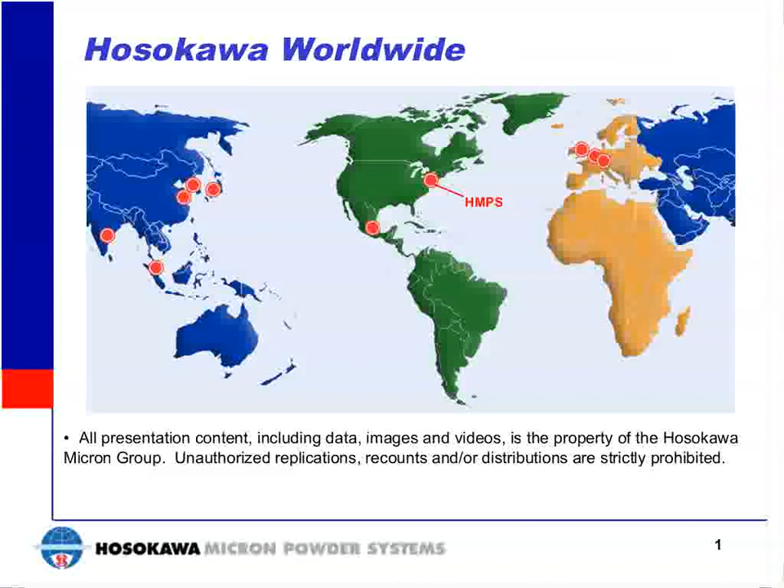Hosokawa Micron Powder Systems is a division of the Hosokawa Micron International Group. Our parent company, Hosokawa Micron Corporation, is headquartered in Osaka, Japan. We are the global leader in powder processing equipment and systems, with 8 operating units and 6 sales offices around the world. We have over 1,500 employees worldwide, production facilities in 5 countries, and 12 technical centers with state-of-the-art research facilities. We encourage our customers to visit our facilities, where they can partner with us to develop new materials and processes on more than 30 different pilot and production lines for size reduction, classification, mixing, drying, and many other technologies.

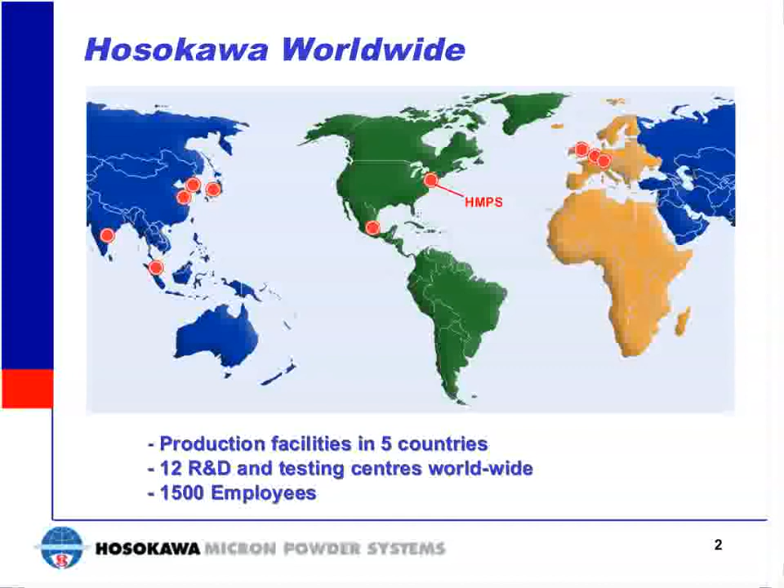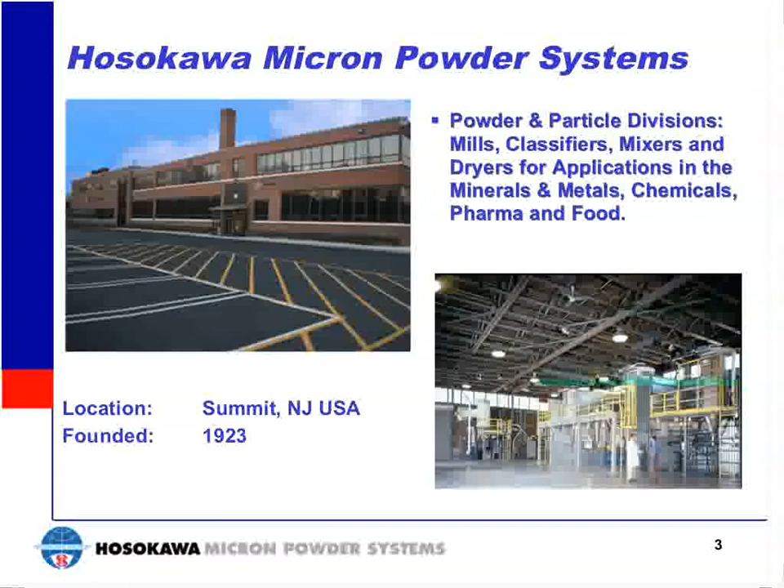Thank you, Greg. Good afternoon, everyone. For the next 35 minutes or so, we will cover the basics of dry powder classification. We will talk about several different types of classifiers and their application. We will also discuss some classification theory, and we will look at how classifiers are used as part of a powder processing system.

Classification and separation of materials is not a new concept. Various forms of classification have been in existence for thousands of years. Significant developments in equipment and machine design over the last 150 years have allowed for the improvement of separating and classifying powders. The end result has been to improve the ability to control the desired separation point, or as we now call it, the cut point, and to optimize the yields of the coarse and fine fractions. Equally as important is the ability to produce high-quality products on a repetitive basis.

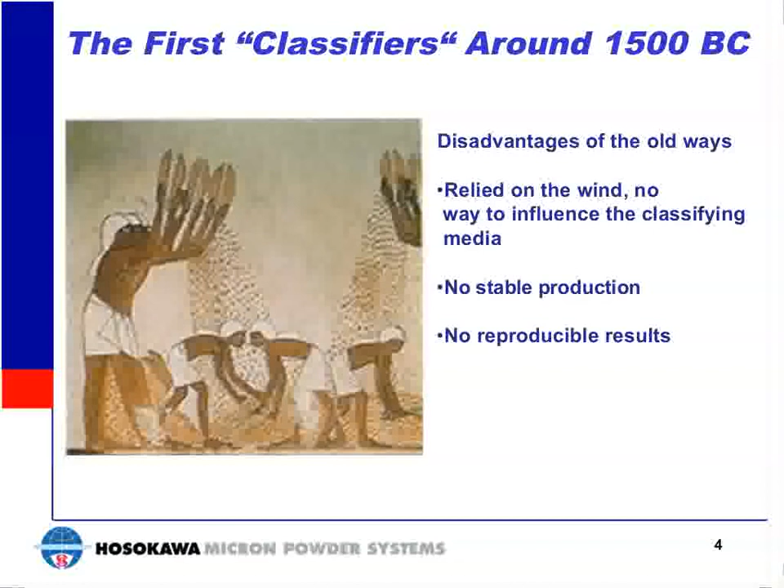Classification is the process of separating or dividing a given material into multiple fractions quantified by its distinguishable property. The most common property being particle size, where we separate larger particles from smaller particles. Another property would be density, separating heavier particles from lighter ones. Particle shape is yet another property for separation, as an example, the separation of spherical particles from plate-like particles. Unfortunately, separation by shape is normally very difficult to accomplish.

Most commonly, the fines fraction is usually the end product, and the coarse fraction is discarded, or as an example, the coarse fraction could be returned to a mill for further size reduction. There are some applications where the end goal is to dedust the product. In this case, the coarse fraction is the end product, and the fines are discarded.

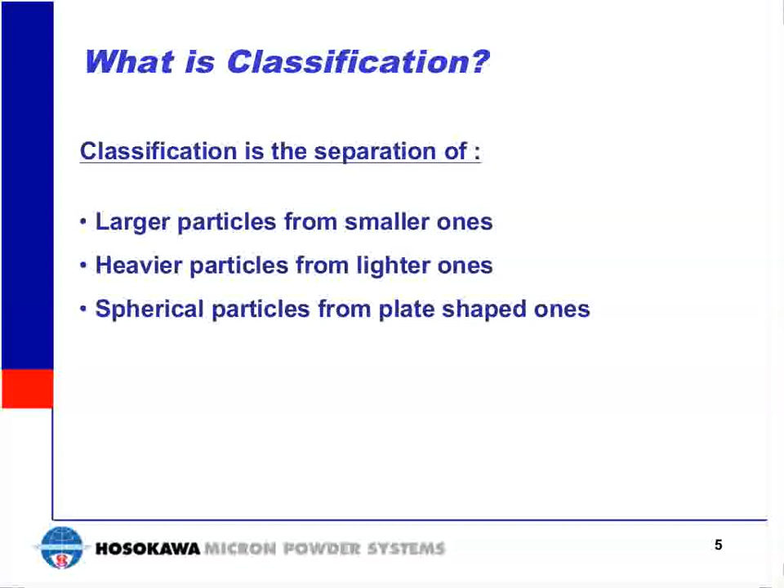There are numerous methods available for classifying dry powders, so we will begin by categorizing these methods by equipment type. Mechanical sieves can be used in various styles to screen or sieve powders through perforated or woven screen sheets with different opening sizes. Crude separation of powders can also be accomplished with cyclones. This is a good solution when only fine particles are to be removed. Gravity classifiers use gravitational force, weight, to create a force on heavier particles, separating them from lighter particles that are more susceptible to the force created by airflow.

Separation by gravity can be accomplished for cut sizes in the range of 500 microns up to several millimeters. For cut sizes of 200 microns down to 1 micron, dynamic classifiers are required. Above 100 microns, mechanical screeners are usually the most efficient and cost-effective method for classifying dry powders.

Dynamic classifiers use a centrifugal force developed by a rotating classifier wheel to oppose the drag force created by opposing airflow to separate particles.

The most flexible and efficient type of technology for ultrafine classification is the dynamic air classifier. It uses the forces we just mentioned to split the powder into two fractions, one fine and one coarse. It's important to note that when separating particles below 10 microns, the energy required to overcome van der Waals forces becomes significant. In these applications, high energy dispersion classifiers are required.

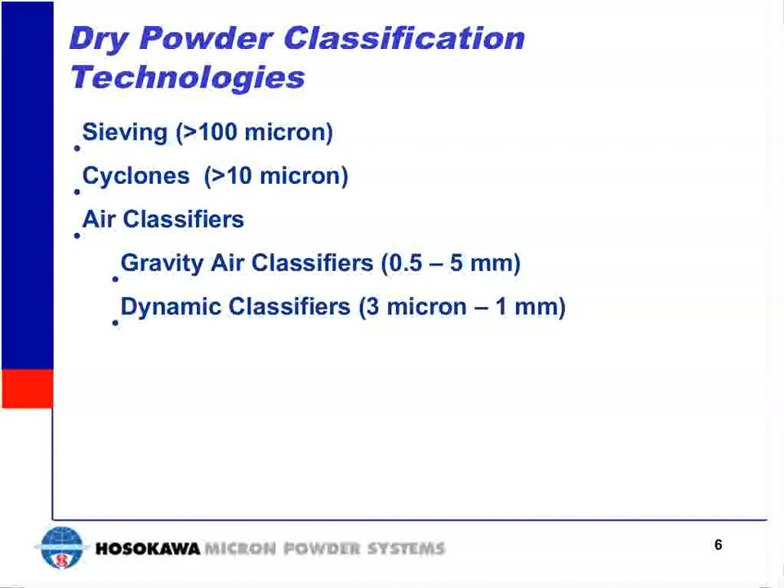Let's spend some time to talk about terminology used in classification.

Throughput is usually defined as the mass flow rate of material through the air classifier. Throughput of a classifier primarily depends on the airflow and the classifier wheel size. Higher airflows and larger classifier wheels can provide higher throughput.

Yield is the measure of the product collected, irrespective of quality, and is calculated as a percent of product, fines or coarse, to the total feed amount.

The next term is classification efficiency. Classification efficiency is the measure of the percentage of the fines or coarse being extracted from the feed material. The exact value of the efficiency might change depending upon the values being recorded.

Cut size is probably one of the most important terms when defining your separation requirement. It is the point of actual separation, defined as the particle size that is found to have the equal probability of being in both the fines and coarse fractions.

Cut sharpness, on the other hand, requires some additional information in order to make a calculation. In generic terms, it indicates how effective the classification is, and how much of each fraction's size distribution overlaps the other classification. In a very sharp cut, each fraction contains mainly the particles above or below the desired cut size.

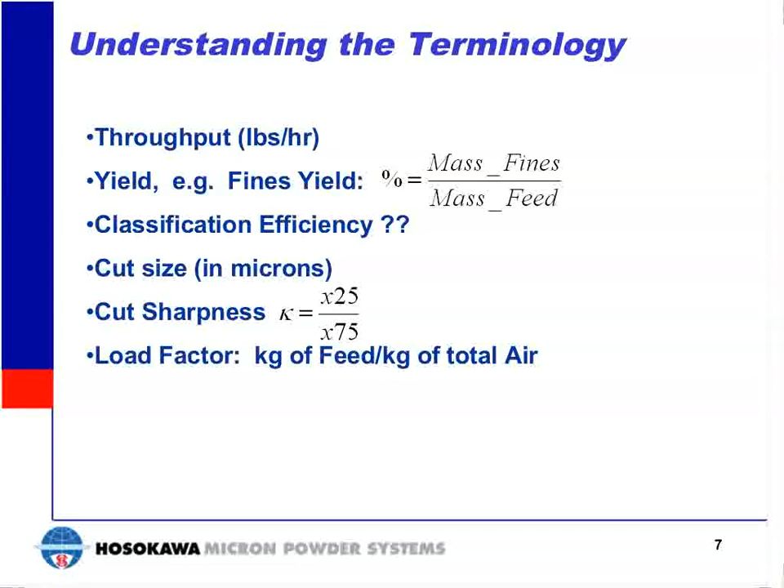So when we're talking about a cut size of 50 microns, we're trying to split our feed material into two streams, with one segment of particles smaller than 50 microns and the other segment of particles larger than 50 microns. Also, by theory, half of the 50 micron particles will be in the fines fraction and the remaining half will be in the coarse fraction.

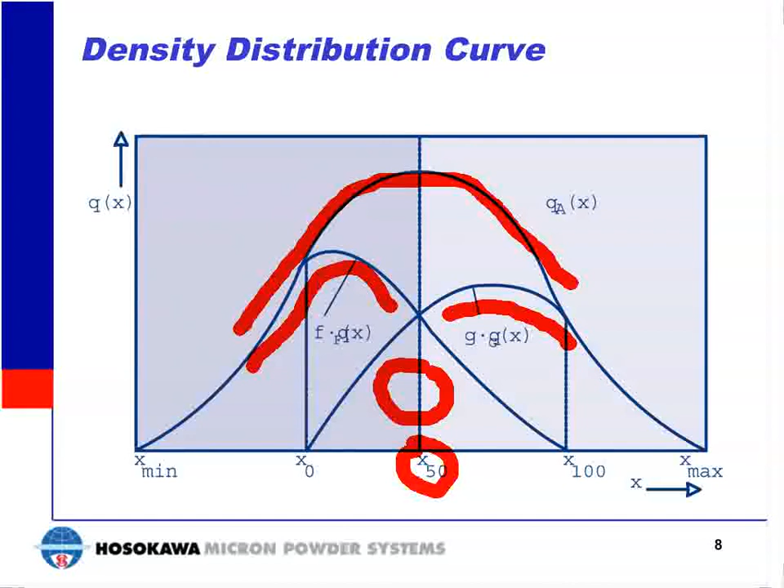Very good classifiers can operate with an overlap value of around 10%. However, in most industrial applications, the overlap is higher, in the range of 20%. It can even be as high as 30% when higher loading factors are employed to maximize capacity. Targeting cut point sizes below 10 microns will also have a negative effect on the sharpness, causing larger overlaps due to the higher interparticle forces in fine powders.

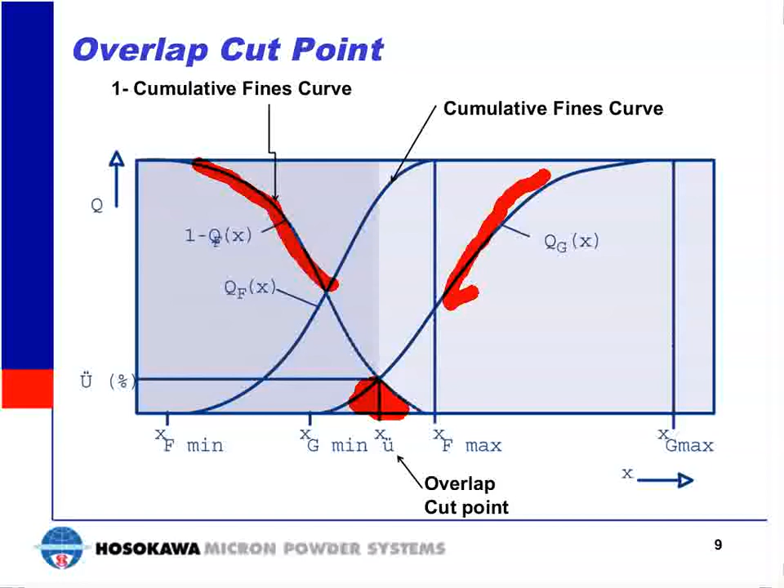Sharpness is often used to quantify air classifier performance. Particle size distribution sharpness values range from 0, almost no classification, to 1, ideal but not really achievable in practical applications. In a production environment, an air classifier's cut sharpness ranges between 0.3 to 0.7. At low classifier loads, the cut sharpness can reach values of up to 0.9. A good classifier can achieve a very fine cut size with a high degree of sharpness.

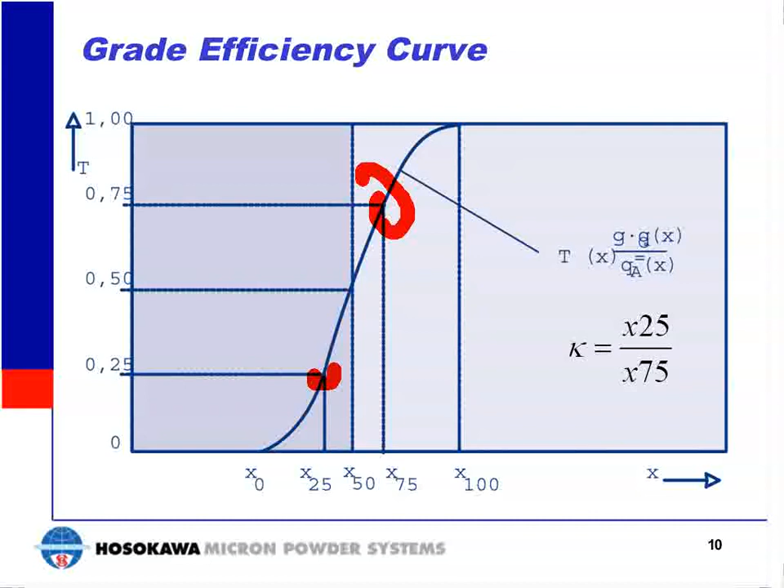First, we analyze the feed and find that in the 100 pounds of feed material, we have 40% of the material below 30 microns and 60% of the material above 30 microns. After classification, the fines fraction contains 30% of the original feed material, with 83% or 25 pounds of the fines fraction being below 30 microns and 17% or 5 pounds of the fines fraction being above 30 microns.

In this case, the fines yield is 30%, and the efficiency is defined as the amount of below 30 micron material in the fraction divided by the total amount of below 30 micron material in the feed material. In this case, 25 divided by 40 gives us an efficiency rating of 62.5%. A similar calculation can be done to achieve the same information for the coarse fraction. Here you can see the efficiency on the coarse yield is much higher at 91.5%.

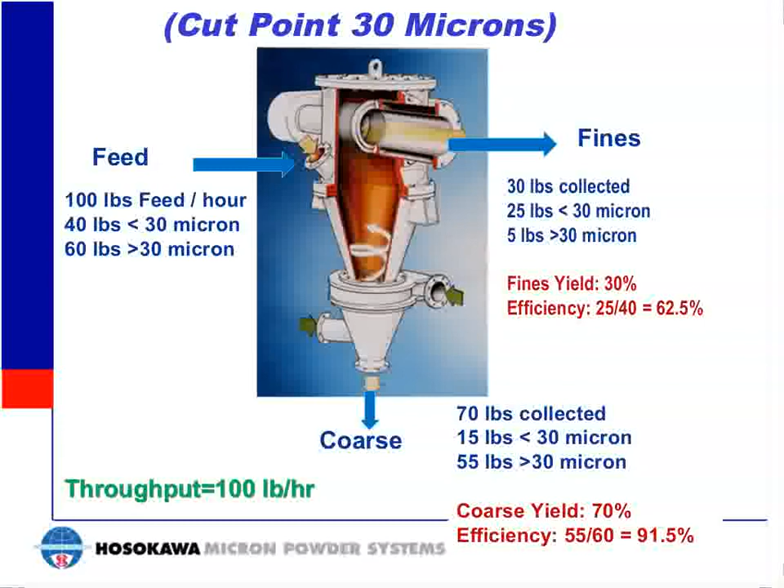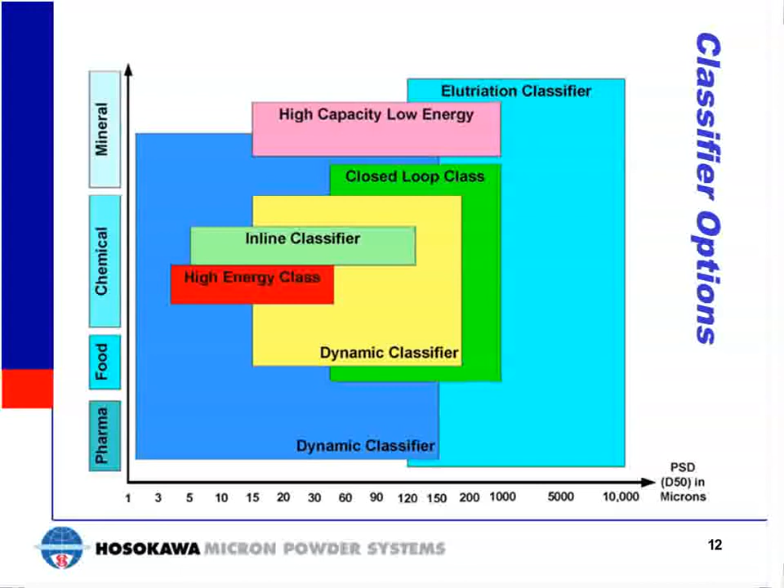The first technology we'll discuss is the mechanical separator. The mechanical separator works via a mechanical screening or sifting technique. This technology uses a wire mesh screen with different opening sizes to separate a given product into two or more fractions. There are two basic types of screeners available in the marketplace.

These units are particularly suitable to classify free-flowing powders with a low angle of repose. Vendors offer a range of screening motions and amplitudes to effectively move the material over the screens. Depending upon placement of the unbalanced load, different types of motions can be created. These devices usually can operate with a 90 to 95% efficiency, which makes them very attractive options in applications where they can be utilized. One of the major drawbacks with this type of classification device can be the blinding of the screens. This can result in significant degradation of sieving performance.

Therefore, a number of different screen cleaning devices have been developed. Some of these options are balls or discs that bounce under the screen to cause additional impact from the bottom up to dislodge particles and keep the screens clean. Another option is reverse airflow, which could consist of a sweeping arm that can blow air from underneath to keep the screen clean. Brushes, ultrasonic devices, or combinations of the above can be used to keep the screens clean and make the screening process more efficient.

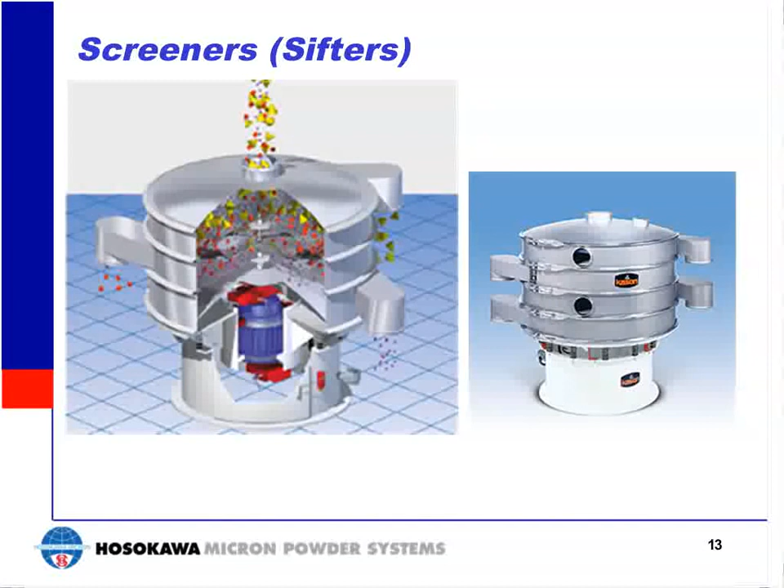There are a couple of additional terms worth mentioning when discussing classification in general. The first term is scalping. Scalping means the removal of a small percentage of coarse material that could be in the feed material. The second term is dedusting. Dedusting is just the opposite and means that a small percentage of the fine material is the undesired fraction that needs to be removed from the feed material.

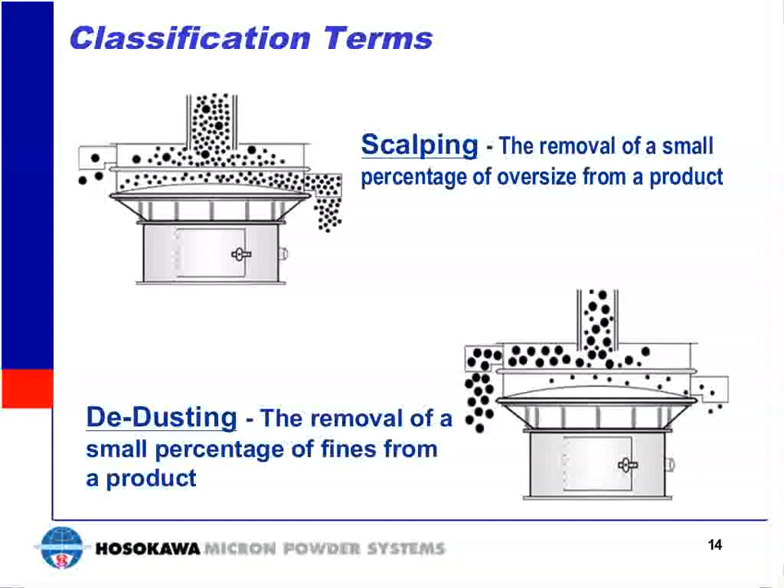Another type of mechanical screening device is a centrifugal screener or rotary sifter. These units are typically used for materials with more difficult flow properties and when higher throughputs and capacities are required. This device uses a cylindrical wire mesh or cloth screen of a specific opening size to control the cut point.

Within the screen, a rotor is used to mechanically disperse and centrifugally force the material to the screen, with the fines passing through the screen into the fines outlet. The coarse material travels horizontally to the end of the screen where it is discharged through a separate coarse outlet.

This type of screener is more suitable for applications where the coarse fraction is not significant, typically in the 10% range or less. One shortcoming of this technology compared to the screening deck we saw on the previous slide is that these units will only allow for one single cut or separation point at a time.

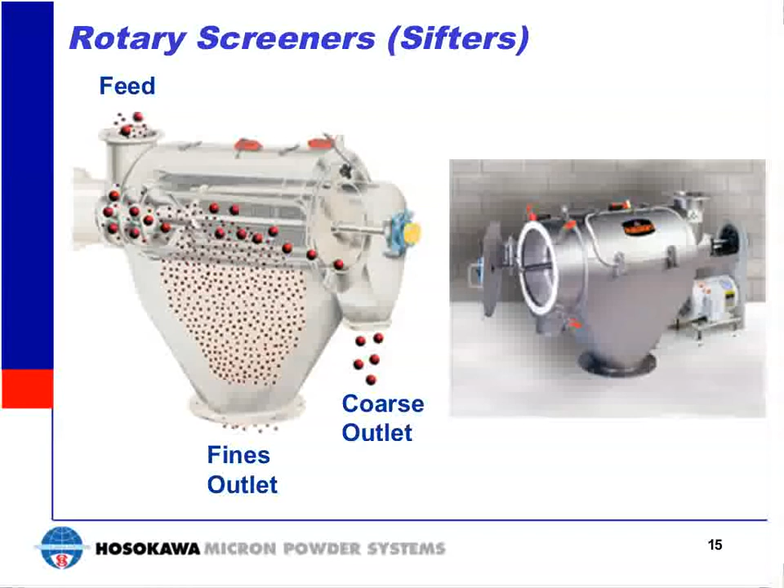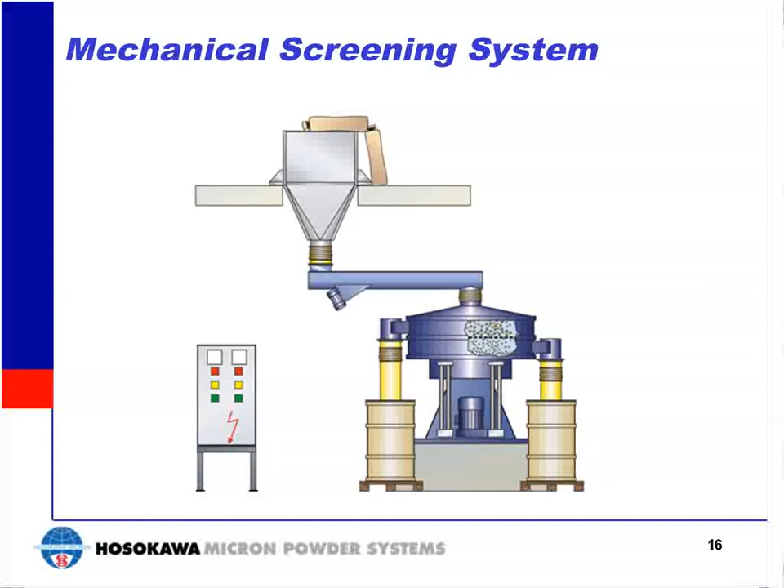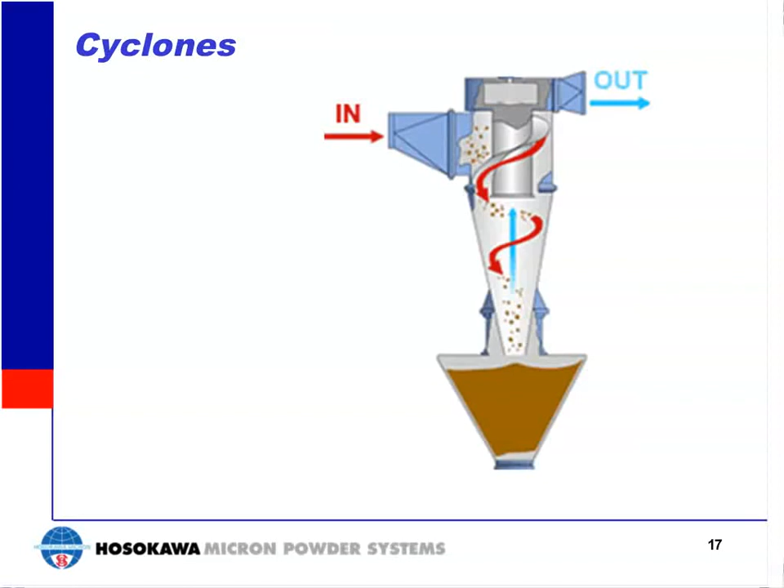One of the parameters that affects performance is the diameter of the outlet tube. By reducing the outlet tube diameter in a cyclone, the effective outlet vortex will be reduced, causing an increase in the collection efficiency of finer particles. The downside to this improvement will be the increase in the pressure drop across the unit.

While a typical cyclone will work with a 6 to 8 inch water column pressure drop, a high efficiency unit can reach pressure drops as high as 15 to 18 inches. Due to their very simple construction, it is also fairly easy to design them for high pressure ratings to handle materials that can present potential explosion hazards.

I would like to add that with most high efficiency cyclones, you will find an additional chamber or dust trap under the conical section of the main cyclone housing. This additional chamber will minimize the chance that the product being discharged will get re-entrained into the center vortex, hence improving the collection efficiency. The simple design of these units makes them easy to troubleshoot as well.

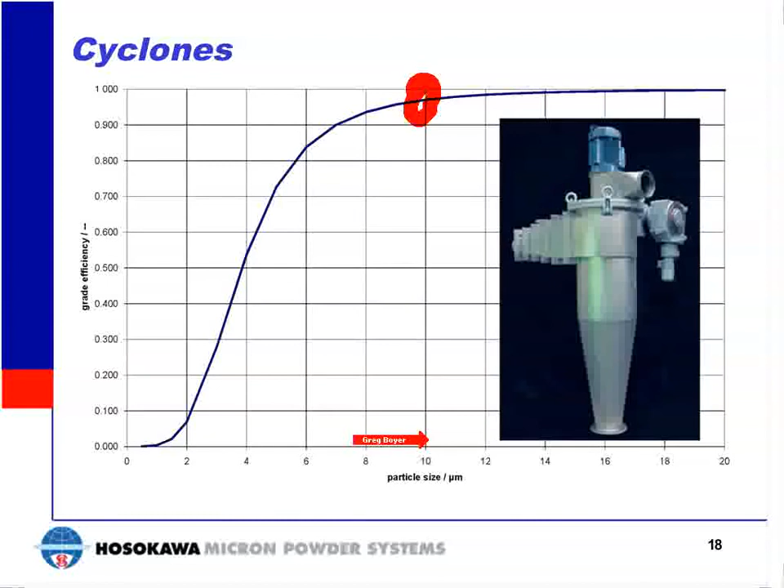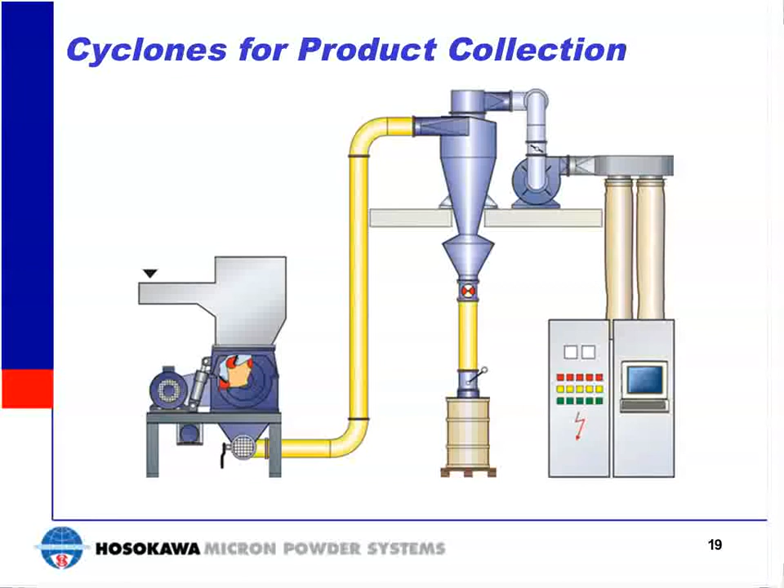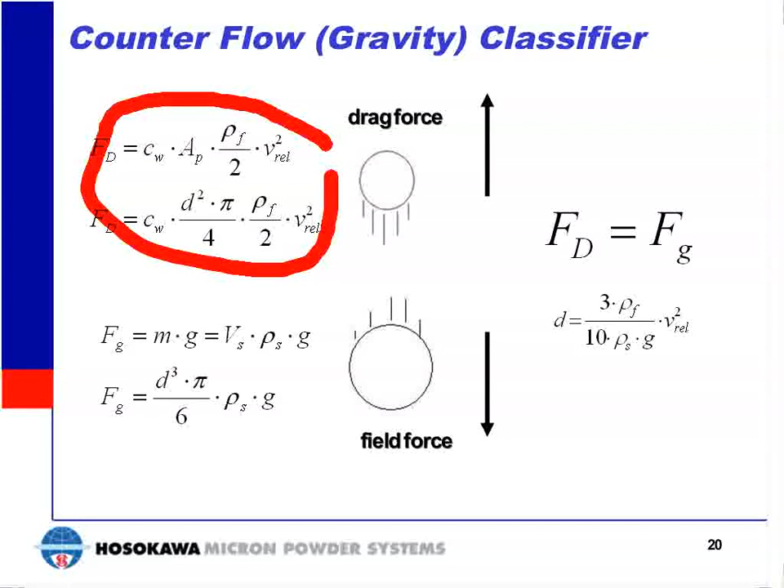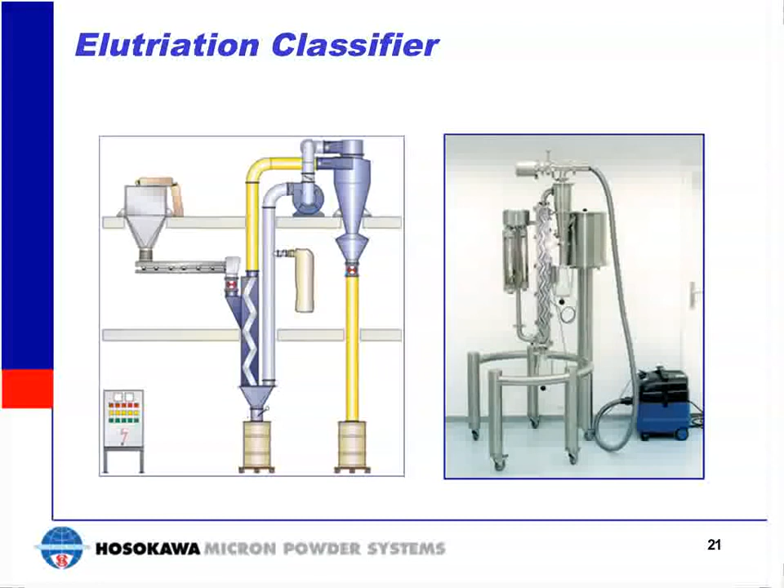Here's a closer look at a production type machine that works on the elutriation principle. As with all air classification techniques, the most important parameter in achieving a good separation is the proper dispersion of the feed material. It is not practical to achieve acceptable efficiencies in gravity classifiers with straight pipes due to the laminar boundary layer of air that develops at lower velocities.

To circumvent this problem, zigzag channels have long been employed in the designs of these classifier types. The zigzag profile offers several advantages: particles that slip down along the walls become caught up again in the flow at every turn of the channel. The zigzag classifier can therefore be regarded as a device with many separation zones, giving it a high separation efficiency in its operational range.

The production unit pictured here is fed closer to the bottom of the classifier. Coarse material gravitates downwards against the airflow, and the fines are conveyed upwards and are collected in a cyclone. The production unit shown here can achieve capacities of several tons per hour and higher. The typical load factor for zigzag classifiers is in the range of 1 kilogram of material per 1 kilogram of air.

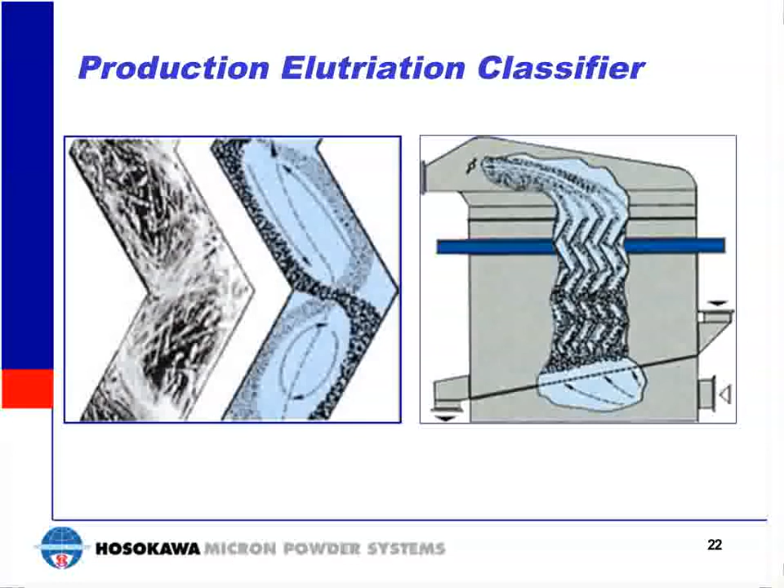The next few slides show examples of classifiers that have a dynamic classifier wheel. These classifiers work on the induced vortex principle of classification, and in addition use a secondary classification principle based on elutriation. The combination of both separation principles gives us a classifier that provides the highest efficiency and produces the best yields. This particular classifier design provides classification in the range of 15 to 150 microns at relatively high capacities.

Due to the medium speed range of the classifier wheel, the advantages of a lower pressure drop across the unit and lower wear rates are achieved.

As shown by the arrow, both feed material and air enter at the bottom of the classifier and are drawn upward toward a vertically mounted classifier wheel. The rotating wheel creates a forced vortex where the airflow draws the fine particles through the rotating wheel, and the coarse particles are rejected by the centrifugal force generated by the rotating wheel and fall by gravity to the coarse discharge at the bottom of the unit.

As the coarse particles fall downward, they pass through a zone where secondary air is induced tangentially into the classifier. This additional air is used to wash and disperse fine particles from agglomerated coarser particles and return them to the classification zone.

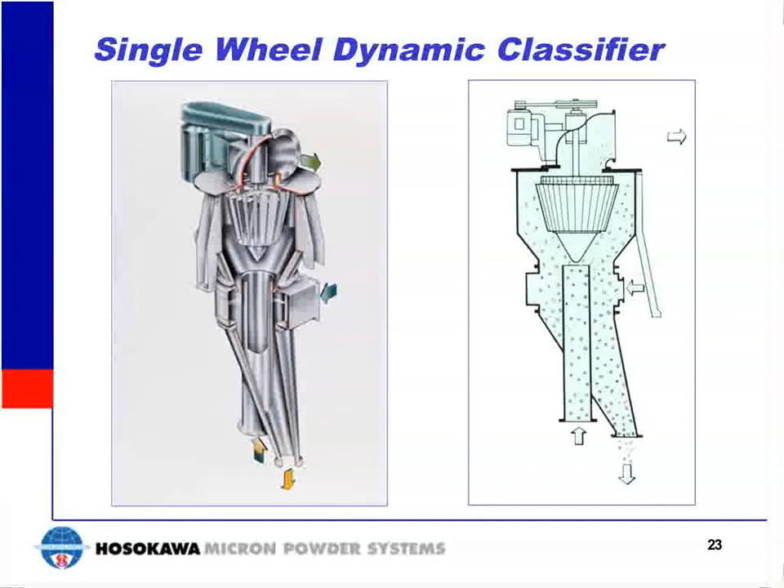This classifier is similar to the type of unit we just discussed. These classifiers can also be fed by gravity, either from the side or the top as shown here, or alternately, material can be pneumatically conveyed into the classifier from the bottom. These classifiers can provide classification in the range of 3 to 100 microns.

In either instance, there's always a secondary air inlet where a fraction of the total flow is used for particle dispersion. Dispersion is one of the most important criteria for efficient classification. There are numerous designs of guide vane rings to improve the separation of fine and coarse particles.

When pneumatic conveying is the means of introducing the feed to the classifier, the split of airflow between the feed and the air dispersion line is usually 50-50, but can also be variable for fine-tuning the classification process.

Air classifiers which are fed gravimetrically from above can operate with high load factors, up to 2 kilograms of material per kilogram of air. Air classifiers which are fed pneumatically from below often only achieve load factors of around 1 kilogram of material per kilogram of air. This value can drop further when there are increased demands on product sharpness.

The incorporation of multiple wheels in the classifier design provides some significant advantages over single-wheel classifiers. Each smaller wheel can now handle a portion of the total airflow, so on larger systems where higher airflow is required, these units can provide significantly higher capacities. Since a smaller diameter wheel can rotate at higher speeds, finer cut points can be achieved at these higher throughputs.

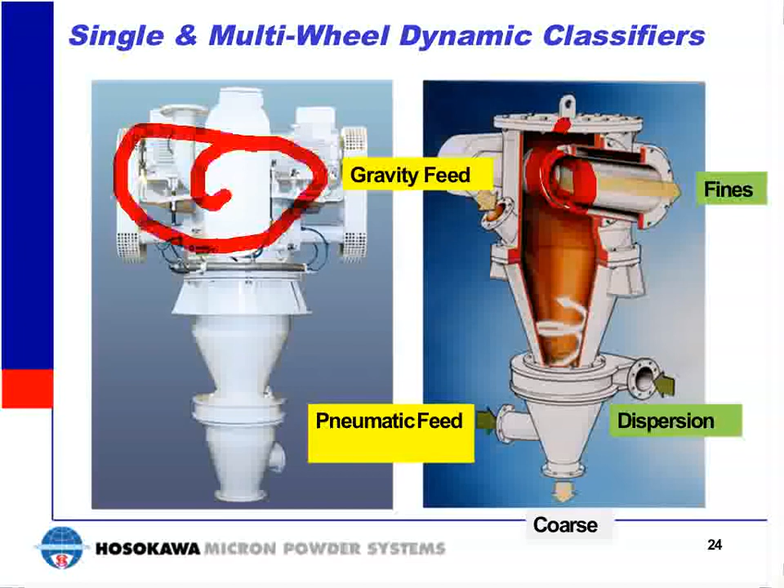As an example, we show both a single wheel classifier here and a multiple wheel classifier here for very large high capacity applications.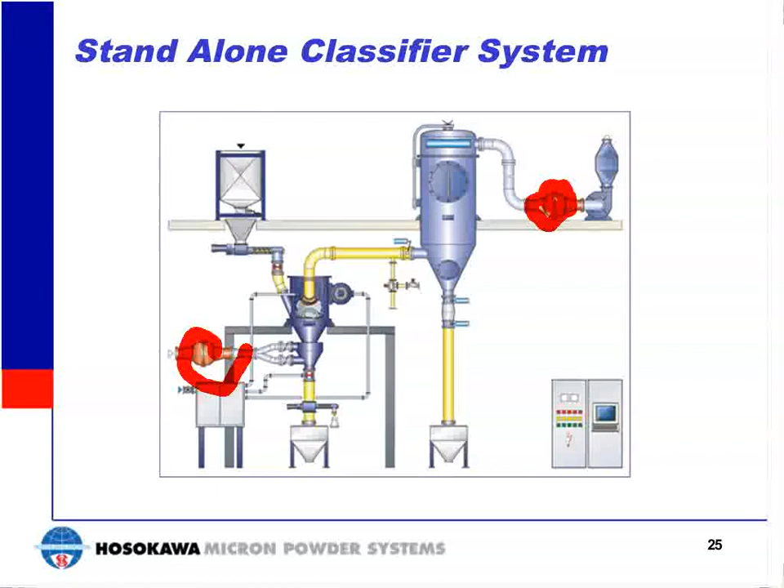I wanted to briefly mention another variation of a dynamic classifier known as a closed-loop air classifier. The advantage of this type of classifier is that there is no need for additional ancillaries like a fan, cyclone, or dust collector to complete the system. This type of classifier can stand alone.

The motive air is generated by an internal fan that circulates the air within the main housing, shown here in the blue loop. This helps in dispersing the material while carrying the particles to the dynamic classifier wheel shown here in yellow.

The finer particles that pass through the classifier wheel are directed to the outer housing and flow downward for discharge, while the coarse will be discharged through the inner cone and out the bottom side outlet.

There are some limitations to this technology. The achievable cut point is usually not very fine, typically in the range of 45 to 150 microns, and not as sharp as some of the high-efficiency classifiers we discussed.

These units are also large in size, and due to additional internal dispersion vanes and other components, are not very suitable for regular cleaning. On the other hand, they offer a lower capital cost than conventional systems and have a low specific energy consumption. Cut point is adjusted via a change in the classifier wheel speed and or fan speed.

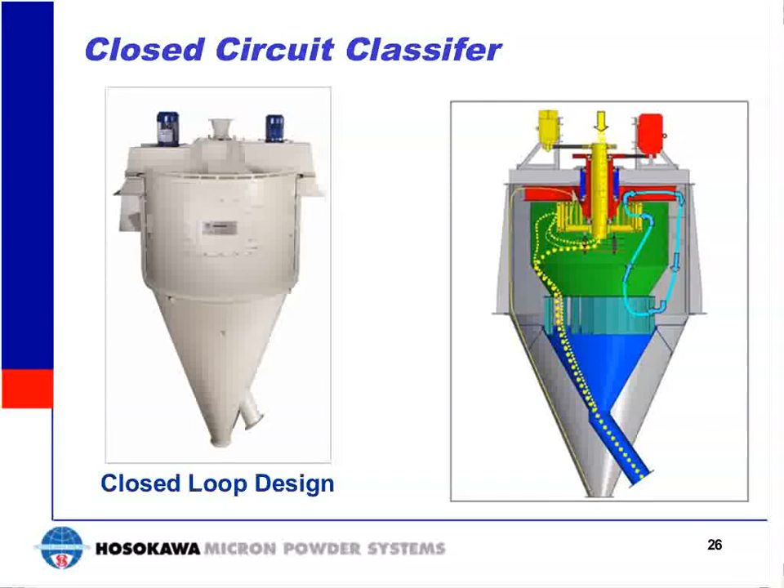This slide shows a multi-wheel classifier installed as part of a complete ball mill grinding system. The multi-wheel design provides a fine product cut point at high capacities. Large capacities are typically required for large minerals processing systems.

In this system, the coarse material ejected from the classifier is returned to the mill for further size reduction. The combination of a high-efficiency classifier and state-of-the-art controls provides for a superior performance in these types of size reduction systems.

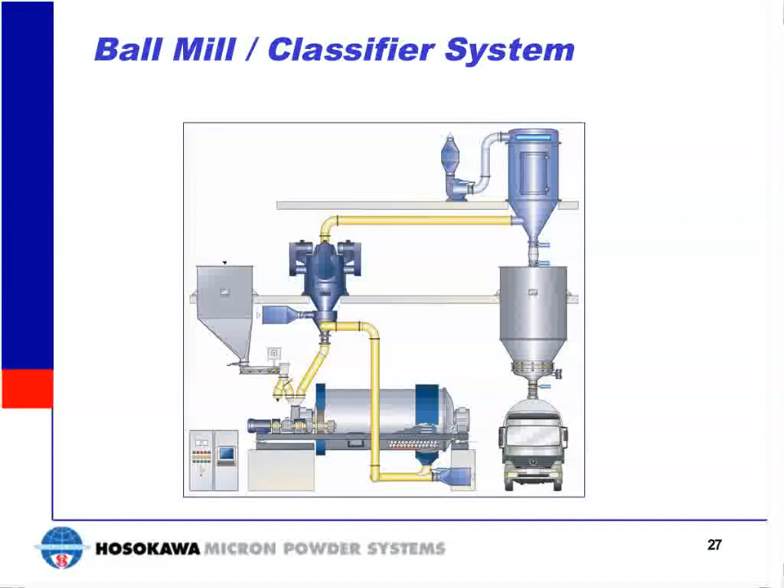This slide depicts a size reduction system with secondary classification capabilities. It also includes a cyclone for secondary product collection and a mechanical screening deck used as a safety system to scalp off out-of-spec material. In this system, a mechanical impact mill provides the size reduction capabilities for the application. The mill's internal classifier provides top size control of the particle size distribution. The inline classifier, close coupled but downstream of the mill, provides the bottom cut, the removal of fines from the particle size distribution. This combination of classifier mill and inline classifier provides for a very steep particle size distribution.

So here you can see several of the technologies we discussed: the inline classifier, the cyclone, and the screening deck, all incorporated into one system.

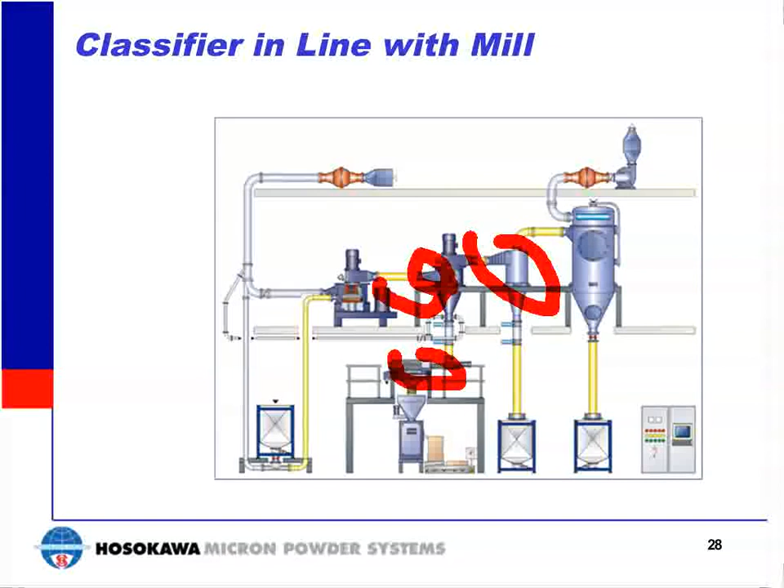The two types of classifiers just shown utilize a dynamic classifier wheel. The principle of operation here is the balancing of the drag force, which is trying to move the particles through the wheel, with the centrifugal force opposing it, created by the rotational speed of the wheel. By equating the opposing forces of FD and FA, shown here,

the basic formula for cut point size determination can be derived. This formula is based on the assumption that the particles are spherical, so depending upon the structure of the particles, additional multipliers can be introduced to compensate for the variance of the drag force.

It is also worth talking about some of the design variations available for classifier wheels. The image here shows a classifier wheel with canted blades, rather than the typical radial blades that are more commonly seen in classifier wheel design.

The advantage of such a classifier wheel is that it will prevent particle scatter caused by the vortices formed on the trailing side of the blades, hence providing a sharper cut. Additionally, an insert tube or an orifice can be utilized with these types of wheels to create a stronger internal vortex to achieve even finer classification. The downside to both of the modifications mentioned is that they will cause additional pressure drop, which will result in a higher energy consumption and an increase in operational costs.

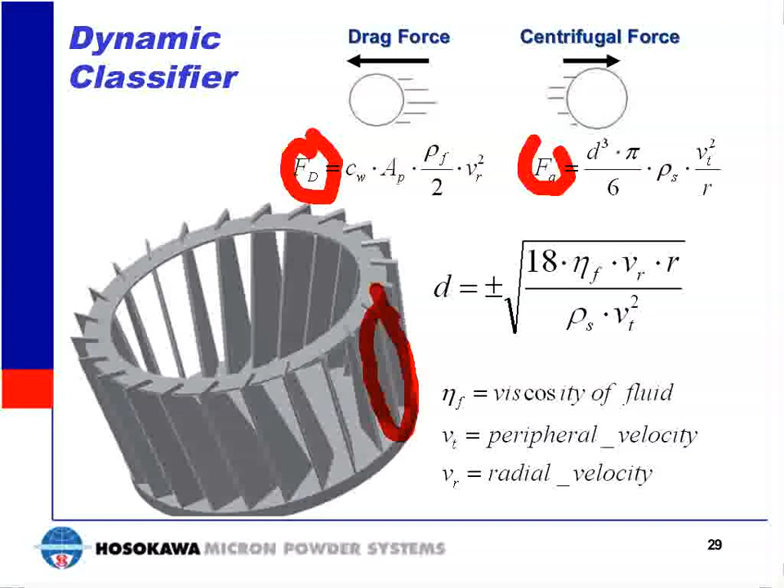It's critical to note here that the effective rotational speed of the wheel, the term VU shown here, is to the second power versus the linear effect of the drag force, which is represented by the term VR. Here you can see the effect of the peripheral velocity on the outcome of the cut size.

In most cases, airflow is used as a means of increasing capacity, as long as the classifier speed required to achieve the desired cut point is within the operational limits of the classifier and drive. On the other hand, reducing the airflow could enable a classifier to produce finer cut points, once the highest effective speed of the classifier wheel is reached.

Looking at this formula, you can see that a small change in rotational speed of the wheel will have a much more significant effect on the particle size cut point than that of the airflow.

One additional variable that can be considered is an extended length classifier wheel. By increasing the length of a given classifier wheel, the enlarged surface area of the wheel allows for a radial velocity to be lowered, resulting in a reduction of the drag force and therefore producing a finer cut.

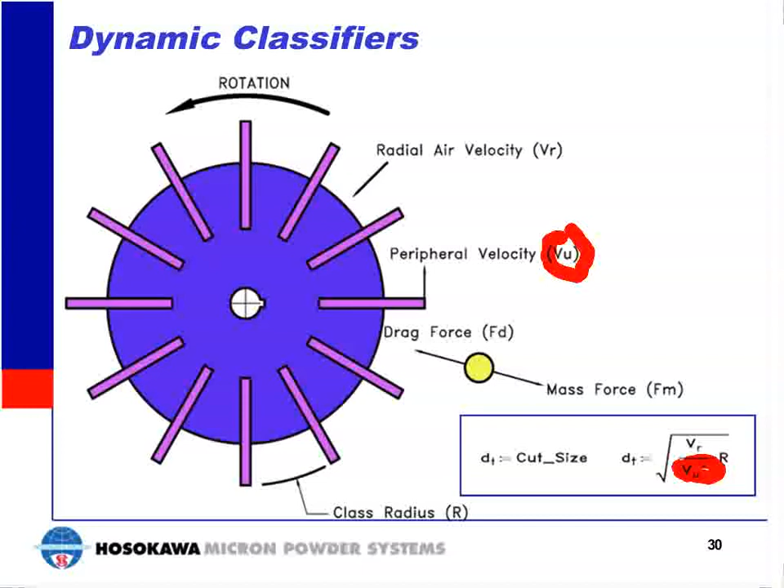We can summarize the variables that affect the performance of a classifier as follows. First, classifier wheel speed: higher wheel speeds produce finer cut points, and lower wheel speeds produce coarser cut points. The second parameter is air volume, where lower air volumes produce finer cut points, and higher air volumes produce coarser products. And lastly is feed rate, where lower feed rates create sharper cuts. The next few slides will show the effect of each parameter in more detail.

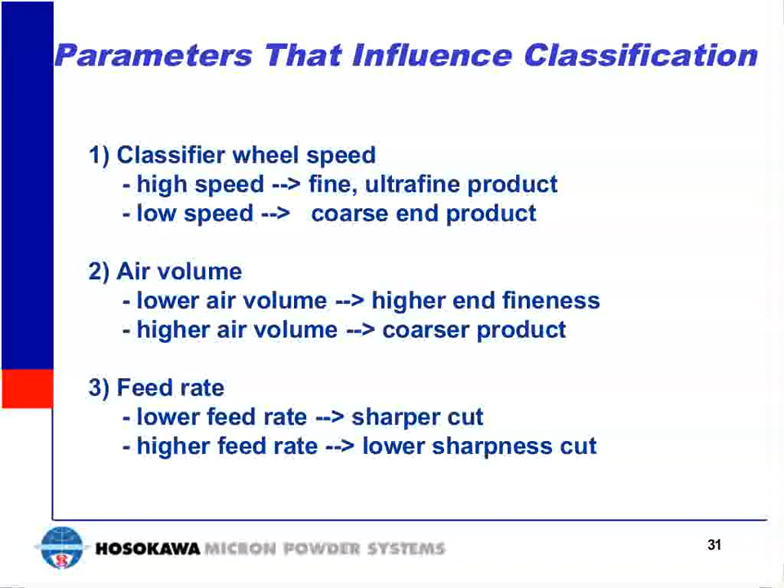With lighter density material, there can be a tendency for material to float around the classifier wheel, causing high motor currents and scattering of coarse particles through the classifier wheel due to overloading in the classification zone. The result will be a reduction in sharpness.

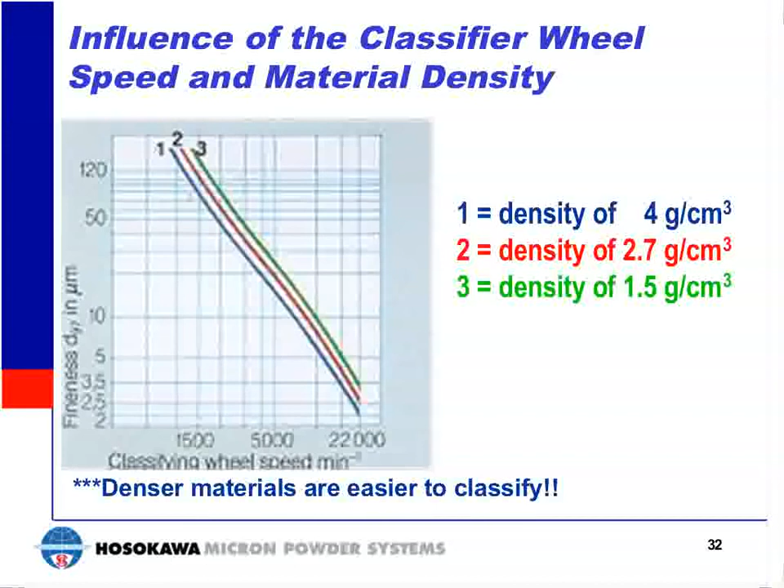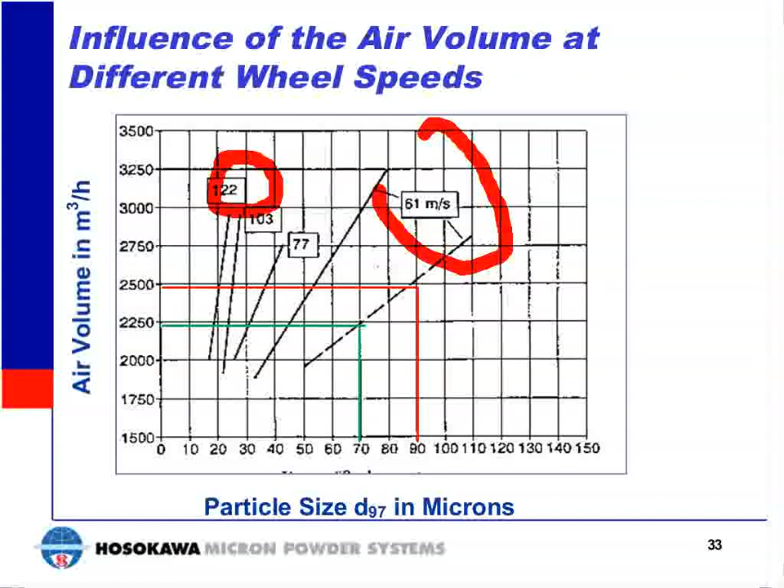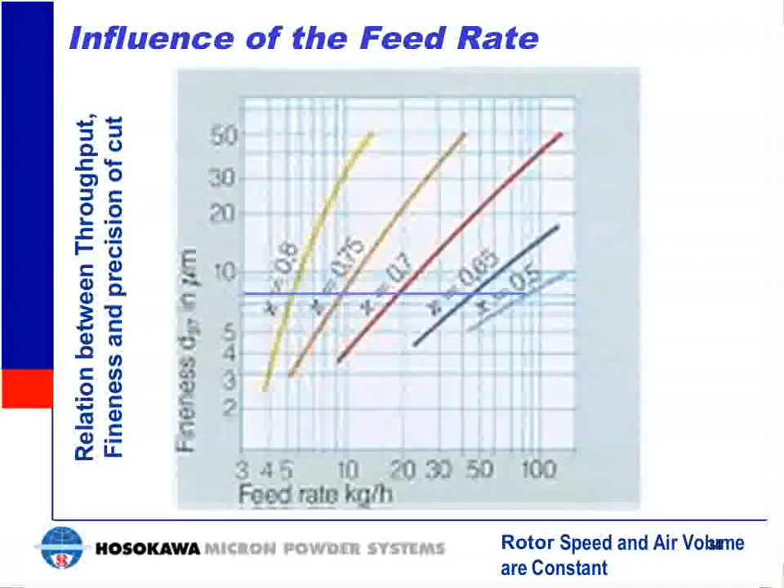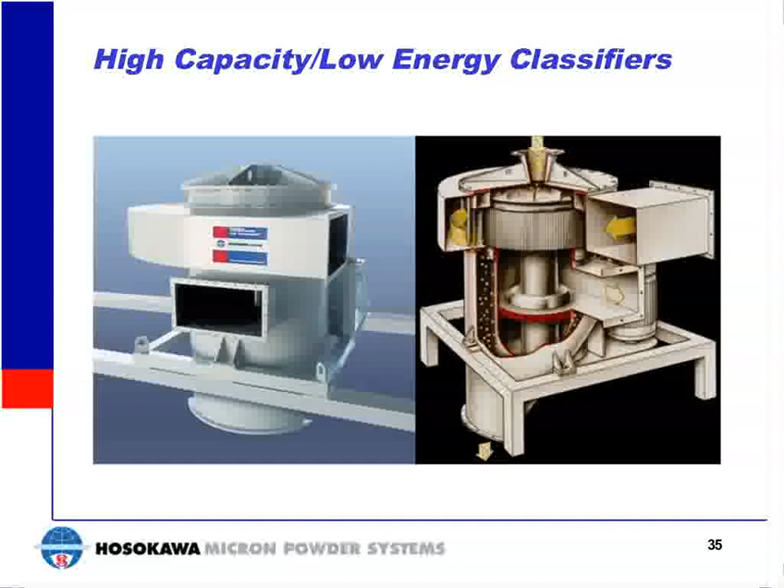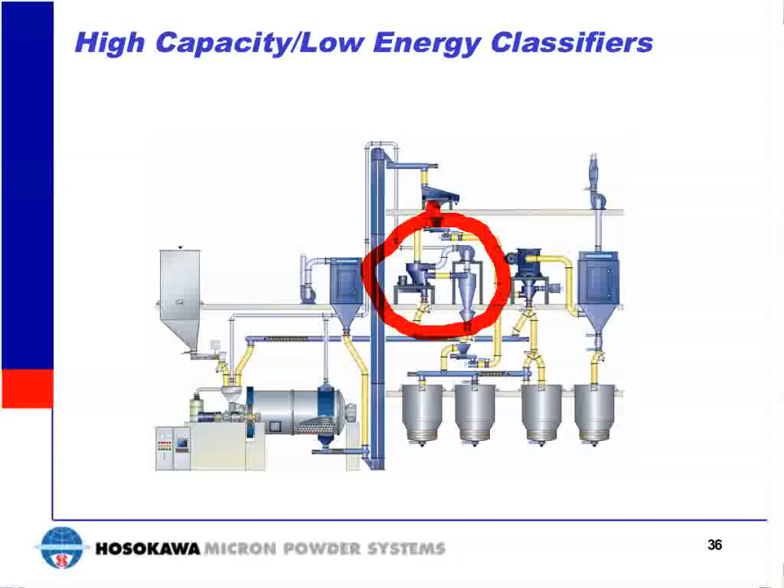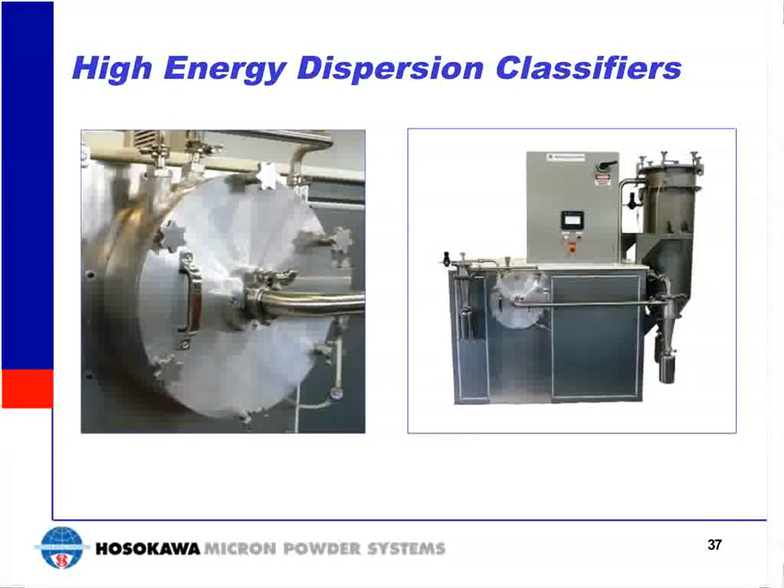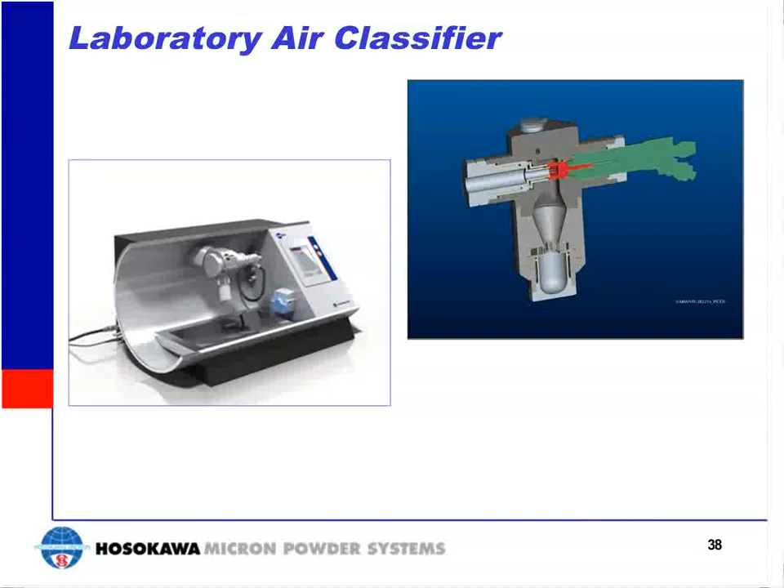Okay, next question. What is the basis for sizing a cyclone? Cyclones are installed as part of a powder processing system, and they're usually sized based on the airflow requirements of the system. That's the most important parameter for sizing the cyclones.

Okay, next question. Can you please explain how material loading affects classifier performance? Again, we discussed this topic a little bit. Classifier loading can affect the performance in several ways. But loading is often adjusted to achieve optimal performance with respect to sharpness of the cut. Since classification depends on good dispersion of particles for efficient classification, a lowering of the loading factor will allow for better interaction between individual particles and the dispersion air, ultimately yielding a better separation.

Okay, we have time for probably one more question. We'll just see if I can find one that's easier. Can any of the classifiers mentioned in the presentation be used with an inline mill? The answer is yes. If the intention is to use a single source fan to provide induced draft for the milling system, then not all the classifiers we mentioned today will work with this type of system.

There are specific classifier designs that use very low amounts of secondary airflow for washing and elutriation. We did talk about those briefly. These classifiers are much better suited for inline systems, as it's basically easier to balance the airflow requirements of both the mill and the classifier when the total airflow requirement of the mill is constant and not divided between the mill and the classifier.